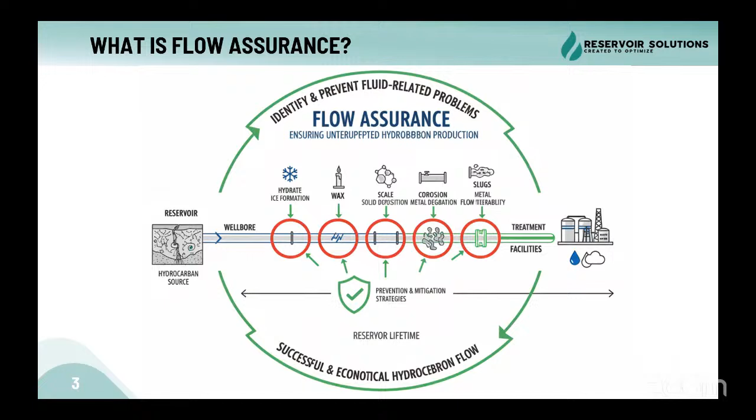So what are the challenges of flow assurance? The main risks of the multi-phase flow inside the reservoir itself, inside the well bore, inside the tubing, inside the flow line, are categorized into 4 categories: first, the abnormal pressure drop in the system; the tubing and pipeline plugging; the liquid handling troubles; and also the tubing and piping integrity.

We will dive deeper into each one of these, but let's first talk about the specific flow assurance challenges. The most specific or most popular flow assurance challenges are the tubing and pipe sizing... Let's continue.

The tubing and pipe sizing, liquid surge and slugging, of course the hydrate formation, the asphaltene, the wax, the scales and naphthenates, the sand formation, emulsion, erosion and corrosion, and the pressure surge. We will talk about each one of these in brief. But just to know, this is only an introductory lecture. We cannot dive deeper into the details of each one, but we will talk briefly about each one quickly.

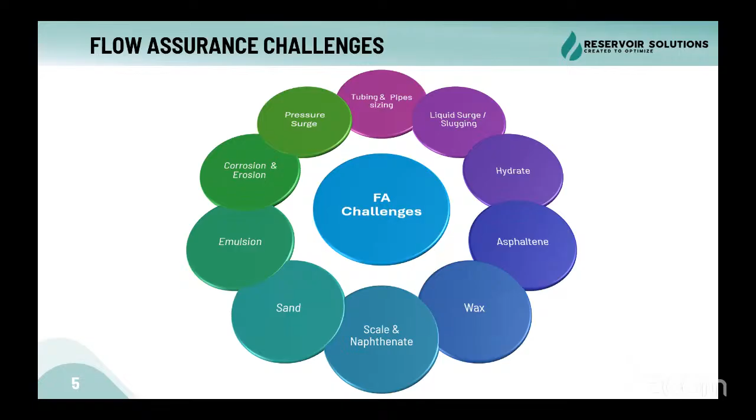So the first one is the tubing and pipeline sizing, which means the pressure drop. It depends on the following parameters: the pressure drop in the whole system at different reservoir lifetime, in order to take the maximum recovery of the reservoir. So the pressure drop matters because we need to take the maximum recovery of the reservoir.

Also, the fluid velocity - the pressure drop affects the velocity as it's high. If the velocity is very high, it may exceed the erosion velocity, and of course it will cause other problems such as erosion. Also, if the velocity is too low, this will allow for solid deposition, which is another flow assurance problem.

Also, the pressure affects the flow regime of the multi-phase flow, as it will be a concern in pressure drop and also in the liquid handling and the hold up of the line. So the sizing of the tubing and the pipelines matters because it will affect a lot of other flow assurance problems.

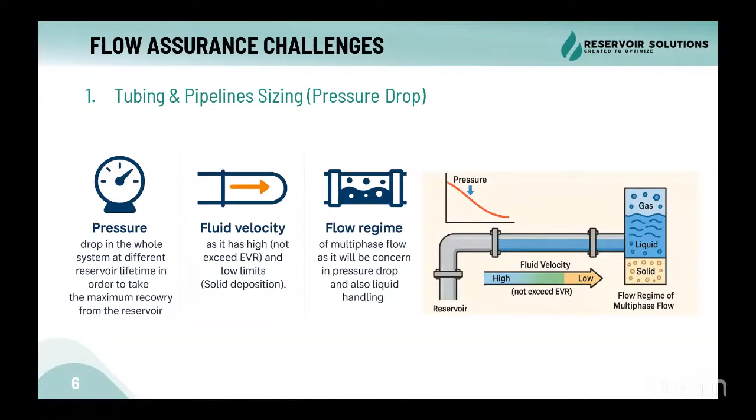The second flow assurance problem is liquid surge or slug flow, which is the most popular problem in multi-phase flow assurance systems. When gas, condensate, and water flow through the wellbore or pipeline, they undergo different flow regimes depending on gas velocity and liquid velocity.

Slug flow is one of the not preferred flow regimes in the pipeline, at which liquid slugs are received at the treatment facilities with limited time to handle, followed by gas phase only. So liquid surge for multi-phase flow is a critical challenge, especially during transient operation, causing a lot of problems to the pipeline.

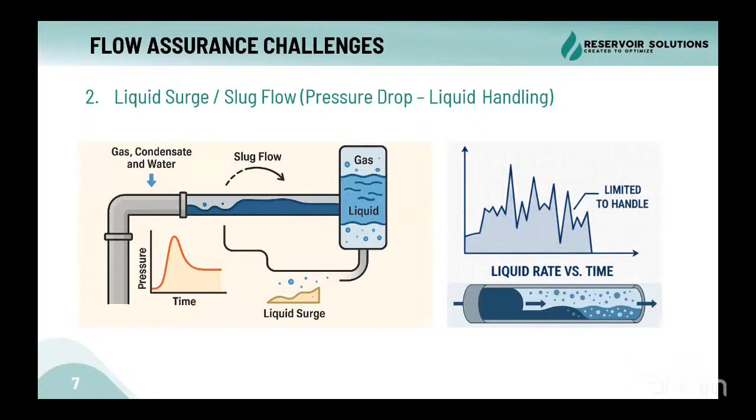It may damage downstream facilities because the surge volume and liquid slugs may exceed what the system is designed to handle. So it's very critical to mitigate the slugging problem in the design phase of the plant from the beginning. The third problem is the hydrate.

Hydrate is a solid ice-like compound of water, at which the water molecule hosts natural gas, methane, or CO2 molecules inside. This causes a lot of problems such as plugging of the pipeline.

This happens at the right combination of temperature and pressure, so there is a hydrate formation curve for the gas. At wellbore conditions of high pressure and high temperature, you are away from hydrate formation, and during flow through the flow line you may not even enter the hydrate formation zone.

But what if a problem happens in your downstream facilities and a shutdown occurs, and the fluid stays in the pipeline for a long time? Especially if the pipeline goes through a subsea system or seabed, the temperature will go down and enter the hydrate formation zone, and hydrate will begin to form.

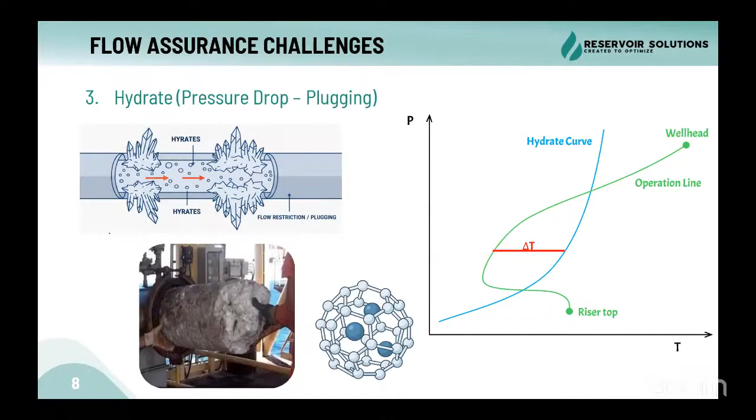Hydrate forms at the right combination of temperature and pressure, mainly high pressure and low temperature. This causes significant problems in the pipeline, potentially damaging it and causing plugging and production loss. This is the most critical flow assurance problem, especially in gas reservoirs.

The next flow assurance challenge is wax. Wax is a high molecular weight compound of oil, which has the potential to precipitate as a solid. As the temperature cools down, wax starts to precipitate and form a layer, as we can see here - this is the seabed and pipeline wall, and inside there is a wax deposit thickness.

The most significant problem of wax is that it reduces the throughput of the pipeline. Imagine you have a 26-inch pipeline, and forming a layer of wax on the inside wall will reduce the pipe diameter and also reduce the throughput of the line.

It will increase the pressure drop inside the line, create back pressure on your wells, and cause you to lose production. So if a build-up of solid waxy layer on the pipe walls is allowed to form, it will require periodical removal to avoid breakage and to increase the throughput of your pipeline.

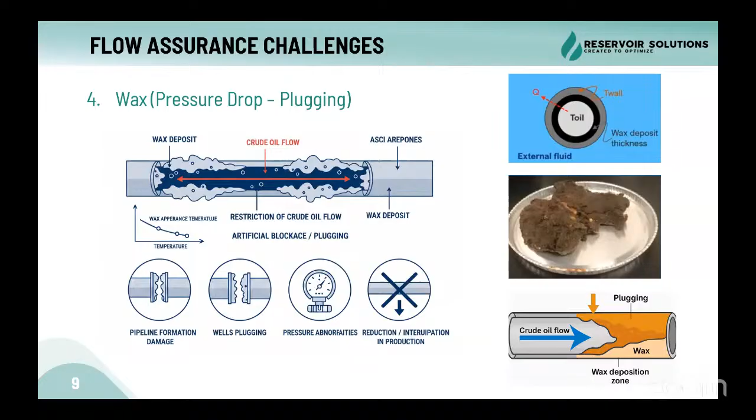The next flow assurance challenge is asphaltenes. Asphaltenes are heavy molecular substances found in crude oil, which precipitate out of the crude oil because of changes in process conditions. Asphaltenes can cause reservoir and formation damage, well plugging and pipeline plugging, and deposition on the surface of facilities. Unlike waxes, asphaltenes don't melt.

The wax can be melted by using heat or steam, increasing the heat of the pipeline to allow the wax layer to melt. But asphaltenes cannot melt like wax, so thermal methods such as insulation and hot oiling do not work to prevent or remediate asphaltenes deposition.

So the most important point for asphaltenes is the asphaltenes flocculation point, which is the pressure at which asphaltenes first begin to precipitate at a fixed temperature. Asphaltenes are related to pressure changes, or as mentioned, operation condition changes.

At this point, the asphaltenes are separated from the resins in the crude oil, as we can see here. After that, they can precipitate in the pipeline and cause plugging and well plugging, and also damage the formation of the reservoir itself.

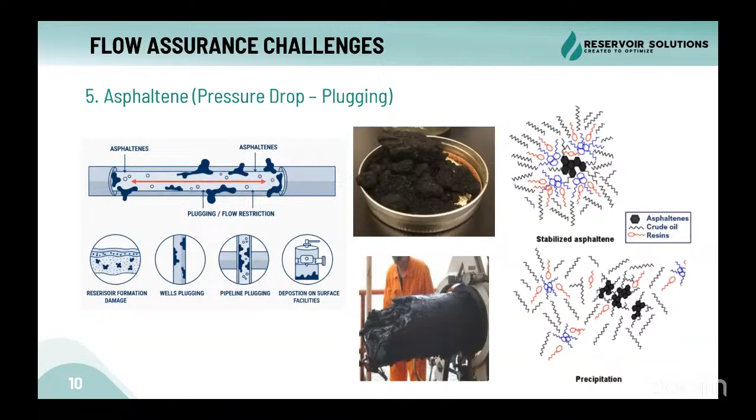The next flow assurance challenge is scaling. Scale means the precipitation and accumulation of insoluble crystals or salts from a mixture. Examples of oil scales are calcium carbonate, barium sulfate, iron sulfides, and strontium sulfates.

A lot of salts can precipitate and cause scale on the pipeline, which also allows plugging of the pipeline, reduces its throughput, increases the pressure drop, and creates back pressure on the wells, reducing production. This is a very significant, critical issue.

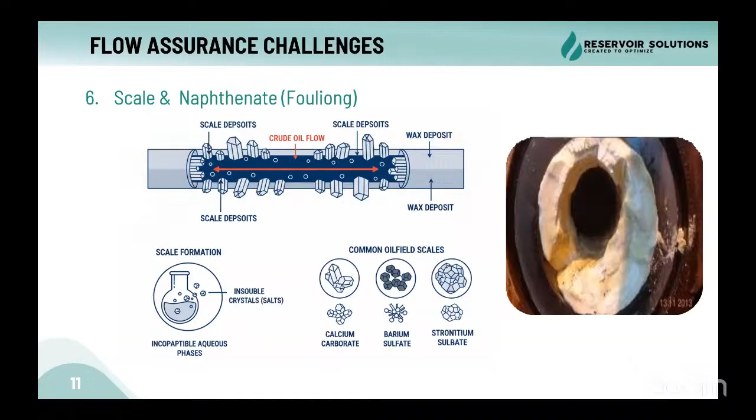The next problem is sand deposition. Sand produced from the reservoir is one of the challenges that affects system production, as it leads to plugging of the wells and pipelines, and it's also a main factor in the erosion process of the tubing and pipeline.

Sand can cause erosion to the tubing and pipelines because it moves with the liquid and gas at high velocity, causing erosion and damage to the pipeline and system integrity.

It can be controlled by installing a sand control system or sand control equipment inside the well, such as sand screens or gravel packing. Those are examples of sand control equipment used inside the well itself.

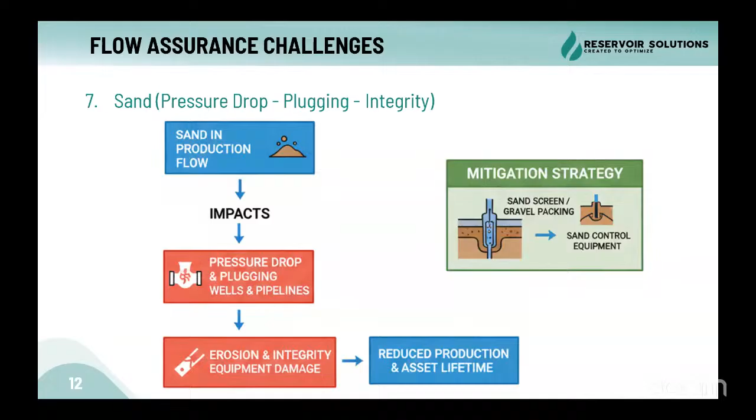The emulsion is the next flow assurance challenge. Emulsion is the immiscible mixture of oil and water. The major impact of emulsion is due to the formation of a stable emulsion, which increases fluid viscosity and can cause high pressure drop in the pipeline.

The pressure drop is one of the most significant problems that can happen in the pipeline, as it affects production, the throughput of the line, and the flow regime. So emulsion can increase the pressure drop inside the pipeline.

The emulsion can be mitigated through chemical injection, demulsifiers, and also by heating. Heating can be used to mitigate or get rid of emulsions, especially in downstream systems.

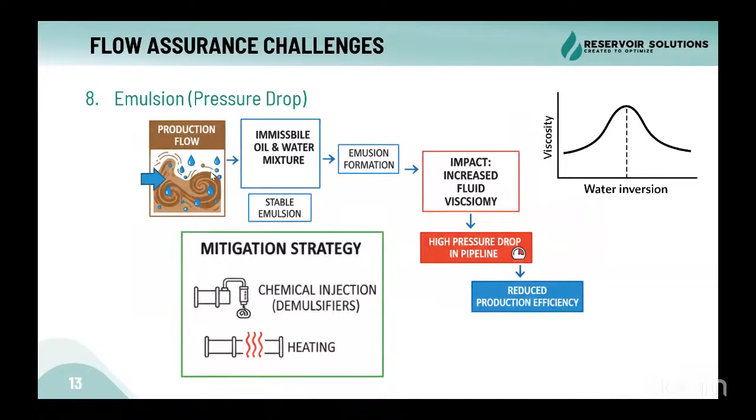The next flow assurance challenge is corrosion. Corrosion of the pipeline is the oxidation and electrochemical breakdown of the structure of the pipe. This happens through oxidation or electrochemical breakdown, and the pipeline corrosion can be either inside the pipeline or outside, external corrosion.

Inside the pipeline, it depends on the fluid properties and the fluid velocity. Imagine if we have H2S or CO2 inside the fluid from the reservoir, and we didn't use any corrosion inhibitor or mitigate the corrosion problem—of course it will allow the pipeline to oxidize and corrode, leading to leakages and structural failure inside the pipeline.

As mentioned, external corrosion is due to the soil, the water, and the outside environment of the pipeline.

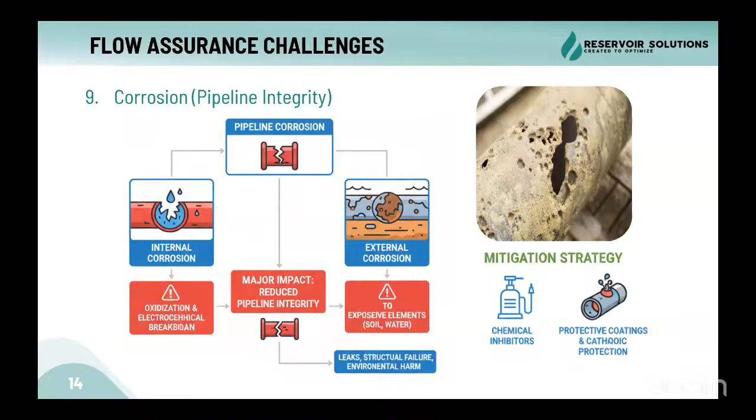The erosion we mentioned previously is related to the velocity inside the pipeline. So when the velocity increases for any reason, such as the gas, it will exceed the EVR, the erosion velocity ratio. When we reach this limit, we start to erode the pipeline from inside.

Can you hear me? Is the mic okay? Anyone? Yes. Do you have any questions? Are we going too fast, or is the pace okay for you?

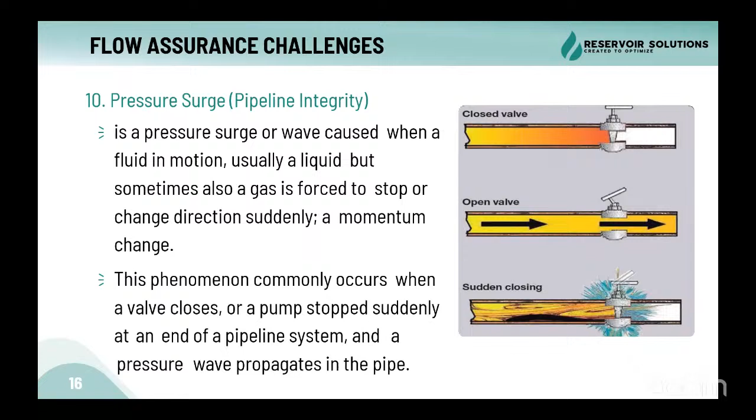This will, inshallah, be studied in detail in the next workshop, the 5-day workshop. We will take each flow assurance challenge in detail and talk about it, and we will also make a practical workshop using flow assurance softwares, inshallah, in the next workshop on October 15th.

So let's continue. What are the flow assurance analyses that a flow assurance engineer can do? Of course, the first analysis is steady state analysis. Steady state analysis just gives you a snapshot of your model, the pipeline, how the pressure will change, how the flow rate will change in the pipeline. You can just make a quick snapshot of your plant using the steady state analysis.

Of course, there's also the transient analysis or dynamic analysis, and it has a main role in the following development phases: such as design and engineering, the mapping of operation limits due to operation procedure changes, which we will talk about in a minute, and also safety analysis, which we will discuss later, inshallah.

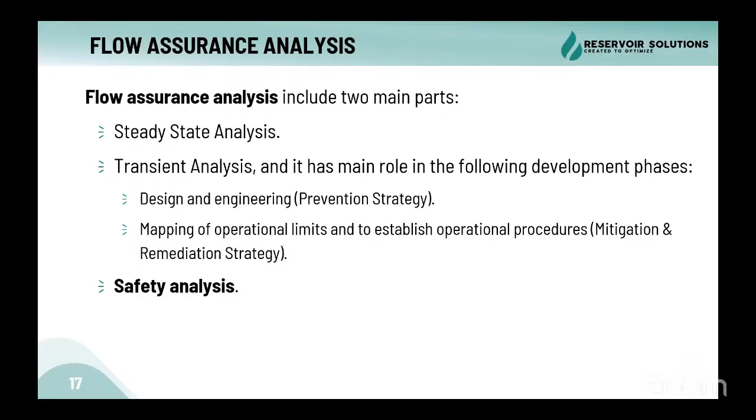In the design and engineering phase, we focus on maximizing the production window. So the sizing of the tubing and the pipeline, at which we select based on the pressure drop, the erosion velocity ratio, the liquid hold up, and temperature profile, should be selected during the design and engineering phase. At this phase, we have to make a transient or dynamic flow assurance study to select the proper sizing of the tubes and pipeline based on our flow characteristics and flow line design.

Also, the insulation and coverage - if the pipeline needs to be insulated due to hydrate formation, maybe due to temperature reduction, if the pipe is going through the seabed, and as we know the seabed temperature is very low, we have to check if it's possible to insulate, cover, or bury the pipeline under the seabed.

Or if we are talking onshore, under the sand, if it's required to be insulated or not. This will help the flow assurance engineer mitigate hydrate and wax formation through insulation and other solutions. Also, if it's required, external heating - if the temperature will drop significantly - we may require external heating or heat jacketing, steam jacketing, also to mitigate temperature-related flow assurance phenomena such as hydrate and wax formation.

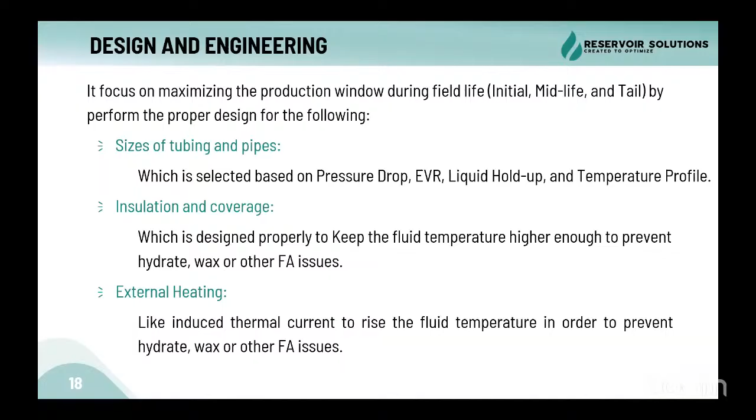Do we require inhibitors for hydrate, wax, or corrosion? This also has to be decided in the design and engineering phase: how we are going to inject them, what quantity is required, where to inject them, and what type of inhibitor is required.

Also, liquid inventory management is very important. As we mentioned, the slug or surge volume of the slugs is very significant to be calculated at the design phase, in order to size the separators and slug catcher to be able to handle the slug volume and the slugging in the pipeline.

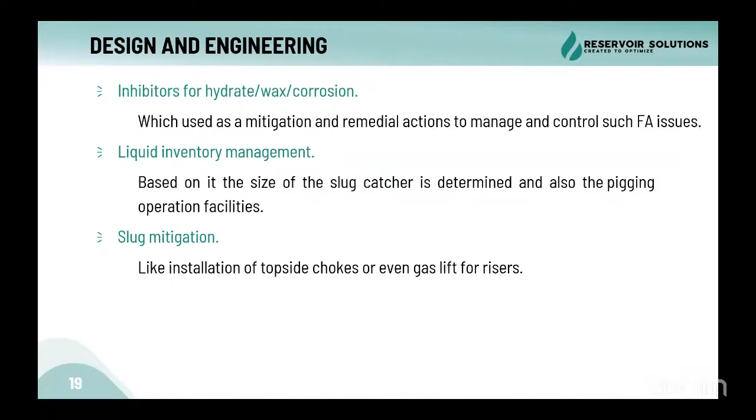Also, we have to design for any pipeline shutdown effect, the pressure, shutdown procedures, start-up procedures, ramp up. This also will affect the pressure surge, as we mentioned in the pipeline. So we have to check all of this phenomenon and run a dynamic analysis and transient analysis to predict if they are going to happen or not, based on our design of the system.

Also, if there is any pipeline blowdown, can the blowdown be handled through the system or not? Are the flow velocities going to exceed the erosion velocity or not? Is there any vibration that will happen during the blowdown? Any flow velocity going to exceed the sound velocity, for example?

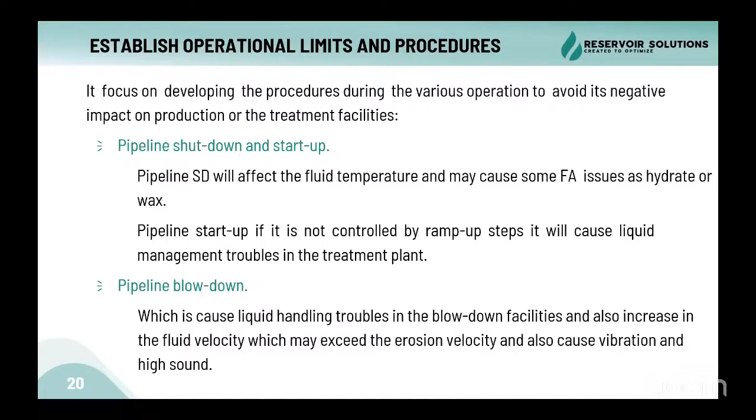So a lot of things can be discussed in the design phase of the plant based on the flow assurance modeling and transient modeling in the system. Also, as we mentioned, if we are going to ramp up or ramp down the wells, is there any effect on the liquid management? Is there any effect due to the turn down ratio of the pipeline being affected or not? Are we going to exceed the pipeline capacity?

Are we going to form hydrate? Are we going to form wax? Also, if there is any ability to do pipeline pigging, what will be the effect of the pigging on the pipeline? How much slugs are we going to receive by applying the pigging on the pipeline?

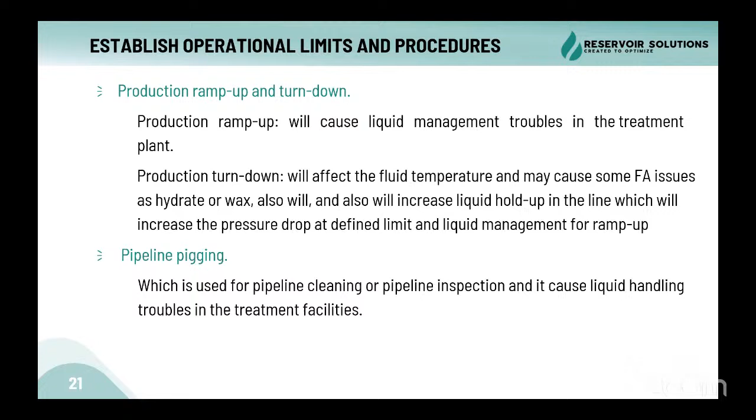And also, the pipeline pigging can be modeled in detail in the flow assurance softwares, and this will be one of our sessions held in the next workshop, inshallah. It will be step-by-step pigging modeling in the flow assurance software, inshallah.

As we mentioned, the slug management, the well shutdown, all of these are related to the operational flow assurance and the transient modeling in the flow assurance studies, which is done during either the operational phase or the design phase and start up of the system.

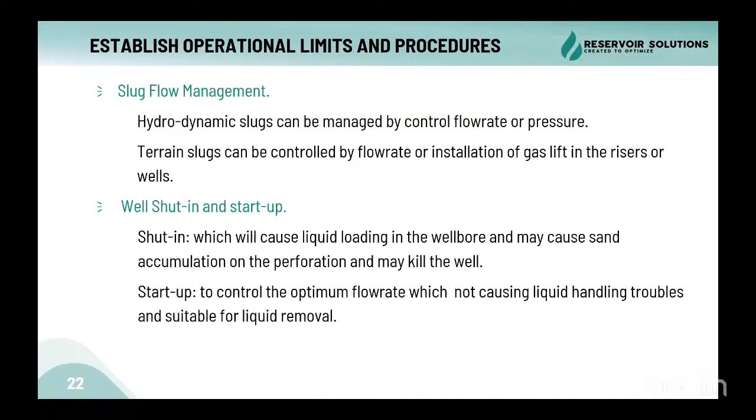Also, another type of analysis done through the flow assurance modeling softwares is the safety analysis. Safety analysis is related to the pressure surge. If there is any sudden closure of any valve, pump stoppage, or any water hammering, this can be predicted easily through the flow assurance softwares. If there is any pipeline leakage or rupture, what will happen to the pipeline? How to mitigate it? This must also be done for the safety and integrity of the plant.

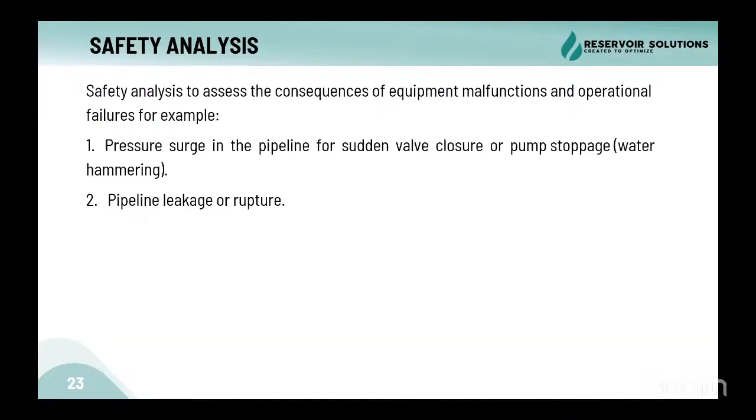So, what is the multi-phase flow? The multi-phase flow is two or more immiscible phases flowing together, such as gas, oil, water, solids, or a combination of them. This is multi-phase flow.

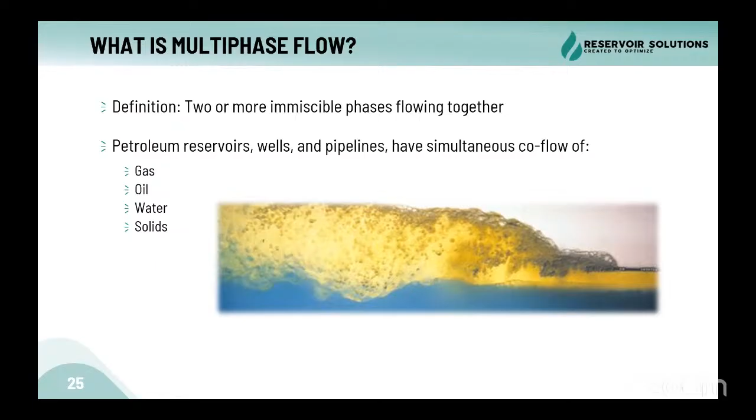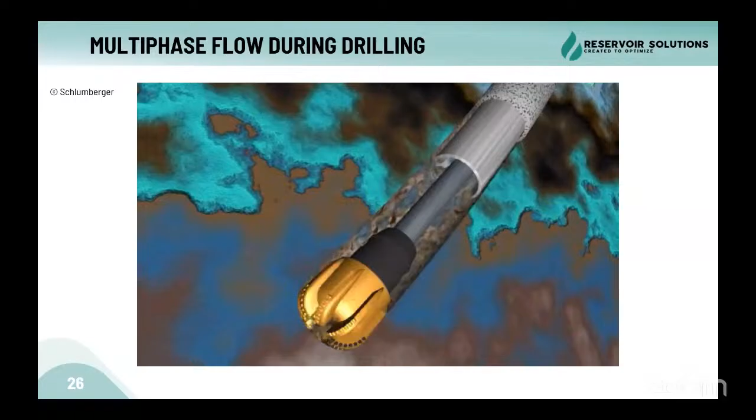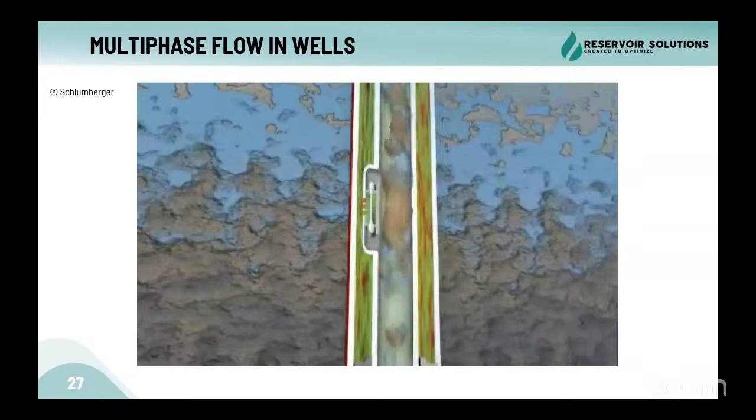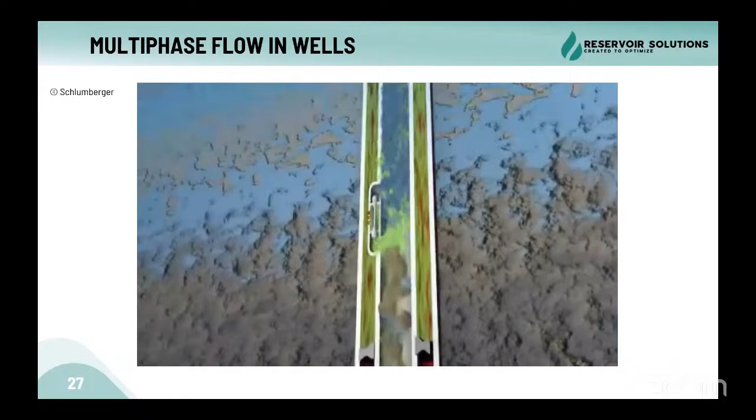Multi-phase flow starts from the drilling, as we can see. Through the drilling, there will be a lot of fluids moving up through the tube, such as the mud, the rocks, even the fluid from the reservoir. And also inside the well itself and the well piping and tubing, there will be multi-phase flow: oil, water, and gas, maybe also solids. So the multi-phase flow is present in all the systems or in all the phases of the plant, starting from the reservoir to the flow line and the onshore plant.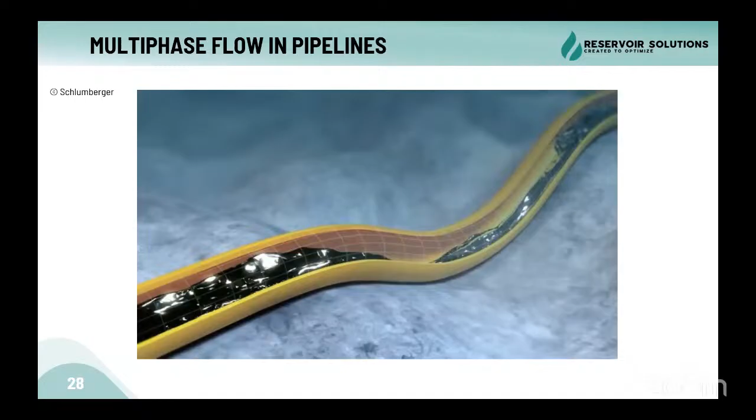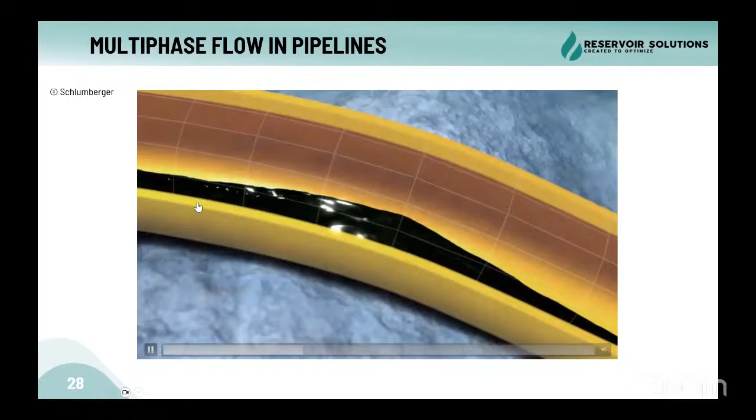And also multi-phase flow can happen during operation due to such operations as pigging, slugging, or liquid surge.

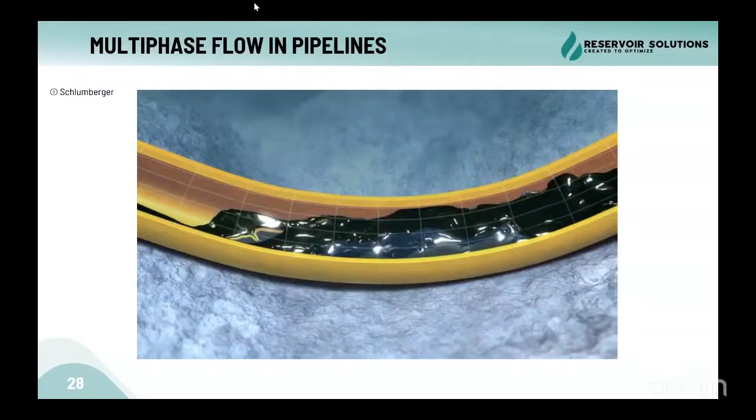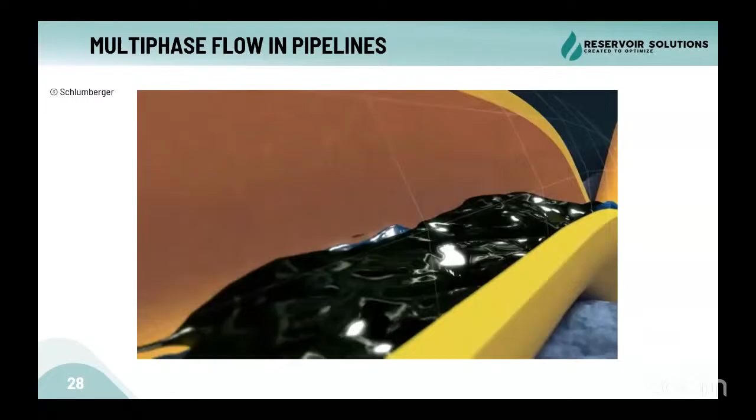Is my voice clear? Do you hear me? Yes, sir, it is clear. Yes, sir, we can. Do you have any question, any comment, anything? I feel like I'm talking to myself. Everything is okay? Yes, sir. Yes, sir. Keep going, it's a helpful workshop. Okay.

So the challenges of the multi-phase flow, there are a lot of challenges, especially for the flow calculation. For single phase flow, the calculations are very easy. You can calculate the gas velocity, pressure drop, everything can be calculated very easily for single phase flow. But for multi-phase flow, the calculations are very complicated.

Most oil and gas flow assurance engineers use a lot of experiments and correlations to predict the multi-phase flow and its properties. Also, due to instability and how to control the multi-phase flow due to changes in velocity, pressure drop, liquid slugging, and the deposition of solids, there is a complex set of flow assurance problems that could happen with multi-phase flow. Also in the separation of the multi-phase flow: water treatment, metering, pumping.

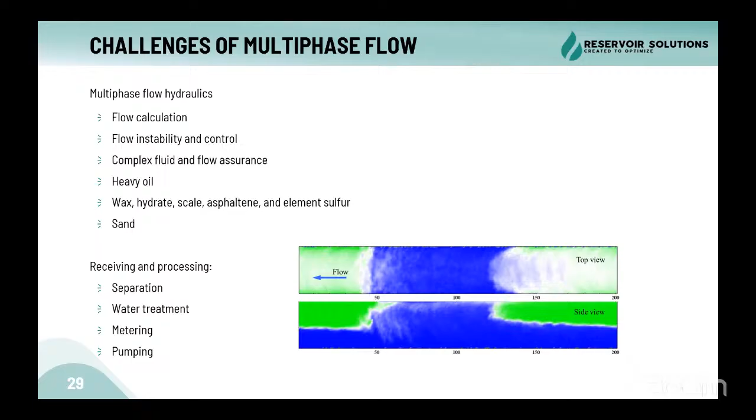So after the fluid flows from the reservoir and through the tubing, it needs to be lifted to the surface. If the reservoir bottom hole pressure is high enough to move the fluid to the surface, it will be a naturally flowing well. When the reservoir pressure is not sufficient to move the fluid from the bottom to the surface of the well, artificial lift systems must be used.

After the fluid arrives at the top, it's usually directed to the downstream facilities, and it may be transported as a multi-phase flow - liquid, gas, water, maybe condensate - and it may also have some sand.

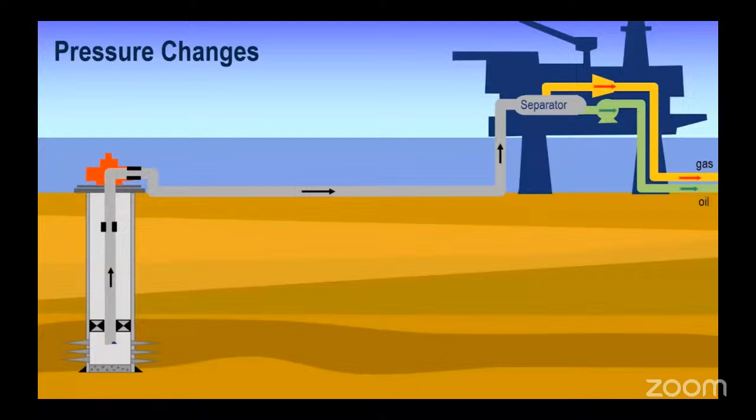The driving force that moves the fluid from the reservoir along the production system is the energy available in the form of compressed fluid in the reservoir. As the fluid moves along the system components, we have pressure drops - the pressure drops continuously in the direction of flow. The reservoir pressure is the moving force, the delta P.

If the reservoir pressure relative to the downstream facilities is enough, the fluid will move to the facilities by natural forces. Okay, are you following up?

So the drawdown of the fluid is a pressure drop between the reservoir and the wellbore pressure. And as we move up through the tubing, there is a pressure drop inside the tubing due to the gravitational force. Also, each element in the system has its own pressure drop.

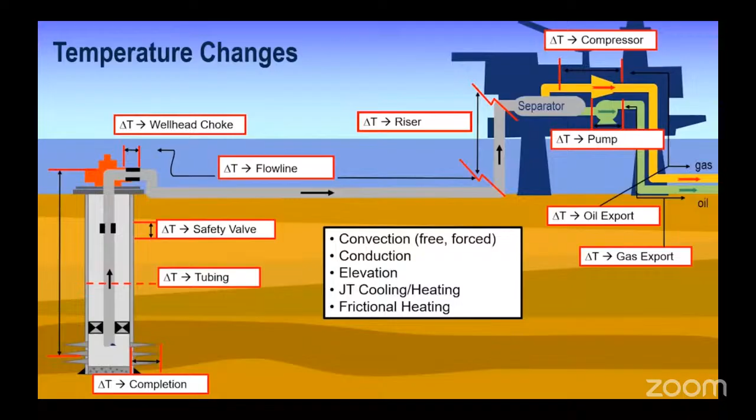Temperature in the system changes as the pressure changes, and we need to take care of the temperature and pressure changes. So we have to make analysis of the systems, such as using the nodal analysis. I believe all of you know about the nodal analysis method, which is used by production engineers - I believe all of you studied it in university. So this enables the production engineer to analyze and optimize the production systems.

We first select a node that represents the inlet, and a node that represents the outlet. Here, the reservoir is the inlet, and the separator is the outlet. And we must specify a fixed pressure at the boundary conditions for the reservoir and the separator.

The inflow is the flow from the reservoir up to the nodal point. So we need to describe the flow inside the reservoir from the reservoir pressure till the bottom hole pressure in the inflow curve, shown here in red color, which represents the pressure loss inside the reservoir. The pressure at flow rate of 0 is the average reservoir pressure, which is what we should expect when the well is in shut-in condition.

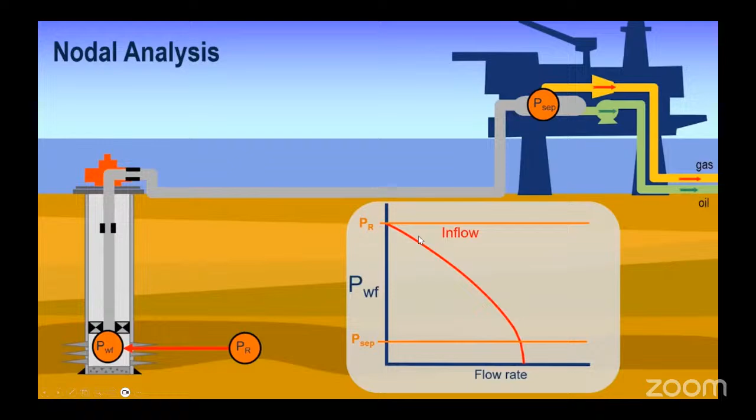As the flow rate increases, the pressure loss increases in the system.

The outflow curve represents the pressure losses in the well and the surface facilities. As flow rate increases, we need higher bottom hole flowing pressure to lift the fluid up to the separator. The intersection between these two curves shows the operating point at which the system is theoretically capable of producing.

We can use this as a basis to examine ways to increase production. For example, if we did hydraulic fracturing, the fracture affects the IPR of the well and reduces the well skin factor, shifting the inflow curve to the right, which increases the productivity of the well.

Likewise, if we install an ESP pump, it shifts the outflow curve, and this has a similar effect of increasing the flow rate of the well.

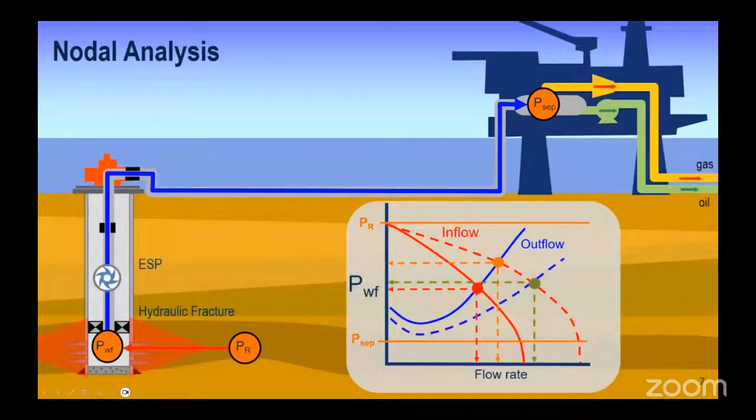So why is multi-phase flow preferred? There are a lot of problems that can be caused by multi-phase flow. So why are we going to use it instead of separating the fluids subsea? Why don't we install a subsea separator to separate the gas from the water, making the flow through the pipeline single phase, and get rid of all these flow assurance problems?

The main reason is economical. We install different subsea systems in different locations, and if the reservoir has different drilling locations, we would have to install subsea separation in each location. This would be very costly, and the capital cost would be very high.

Now flow assurance software has made our life easy. We can make a flow assurance model and keep it running during the lifetime of the plant, which significantly reduces the capital cost of using the subsea system.

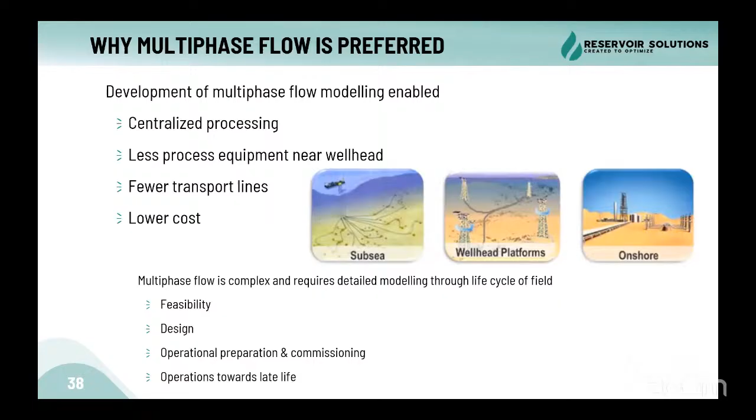As we mentioned, multi-phase flow can be very challenging because it can have gas and water droplets, gas and condensate, and solids just like hydrates, wax, and asphaltenes. So multi-phase flow is very challenging.

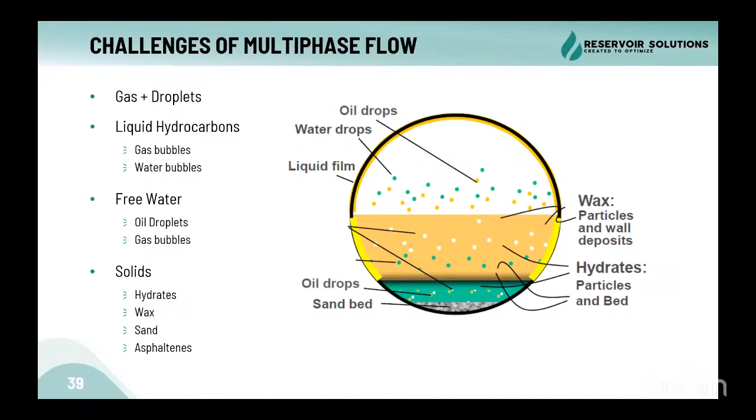Let's check the next experiment. This experiment was made on the Schlumberger Cambridge flow loop. This is a 6-inch pipe with 1,500 barrels of oil per day and 1,500 barrels of water per day, with a viscosity of the oil of about 1.5, more or less like water.

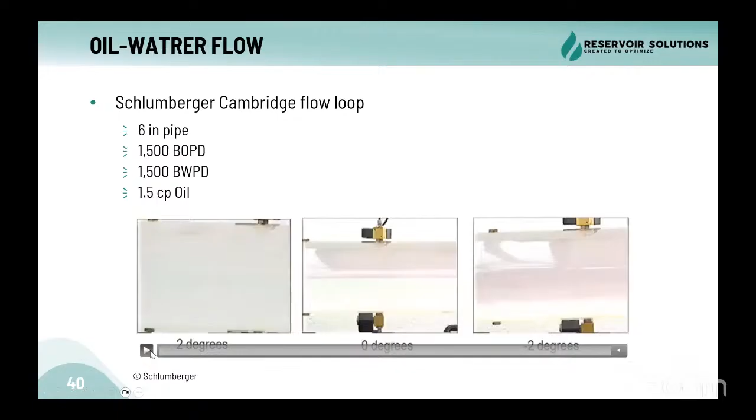First of all, we used a perfectly horizontal pipeline to demonstrate. We made the oil red and the water blue. Let's check what happened during the experiment. In the perfectly horizontal pipeline, you can see the phases are moving at the same velocity, with a very small velocity difference at the interface.

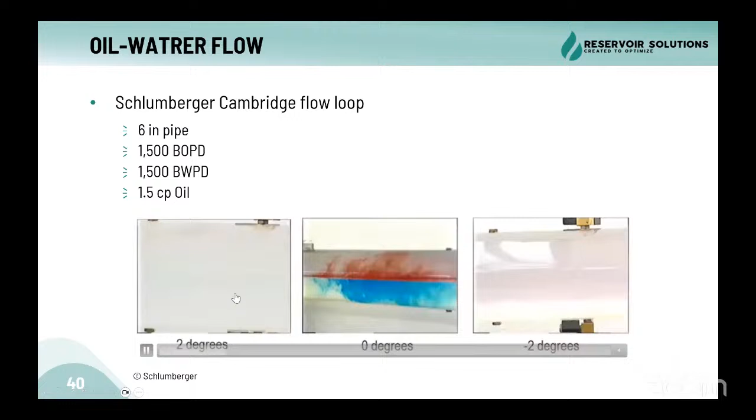However, if we increase the pipe inclination by 2 degrees, it might be noticeable. Let's check what happens for the multi-phase flow with just oil and water. You can see here the oil is moving so fast, and the water is accumulating at the bottom of the pipeline.

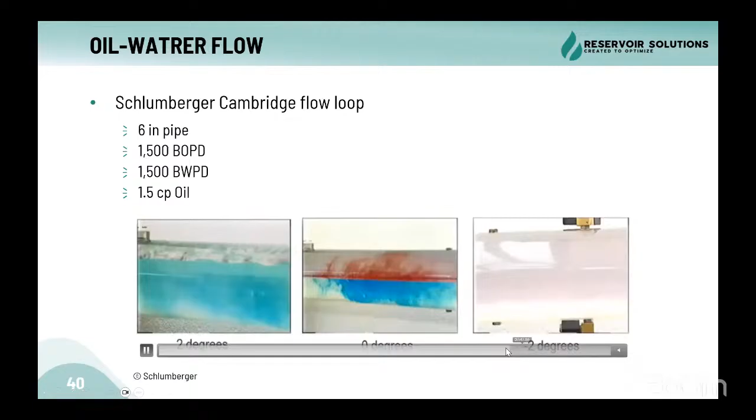So what if we made the inclination 2 degrees downward on the other side? Let's check. Remember, the oil is in red and water in blue. You can see the water is moving very fast. This is just 2 degrees of inclination, which cannot be noticed by the human eye.

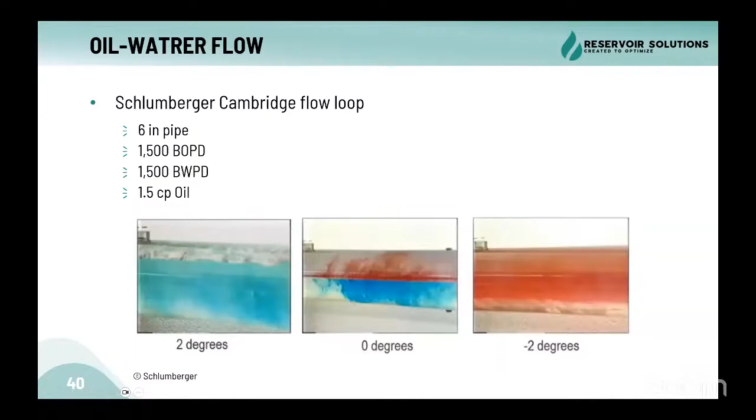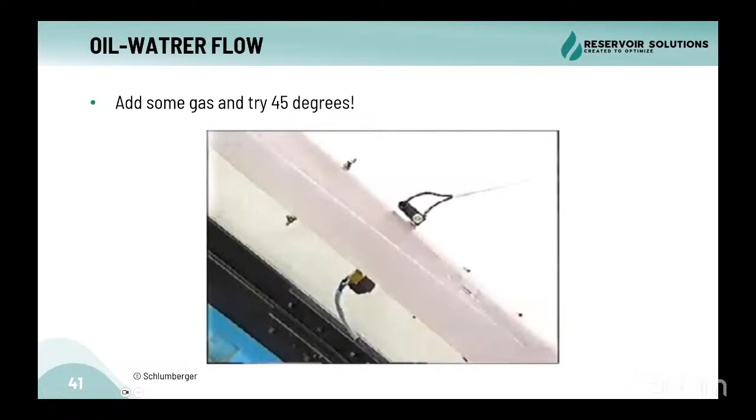So what about if we increased the inclination by 45 degrees and added some gas to the pipeline? Let's see what will happen. Of course, we will have a mess like this. It's very complicated, which is why we need simulation to describe multi-phase flow inside the system.

We cannot just use Excel sheets. We can use correlations to represent the challenges in multi-phase flow, but it must be supported by experiments, correlations, and software to describe it properly. Imagine what will happen along a very long pipeline in a subsea system with different inclinations, angles, flow rates, pressures, and temperatures. There are a lot of challenges that cannot be easily predicted by correlations or by just steady state simulation.

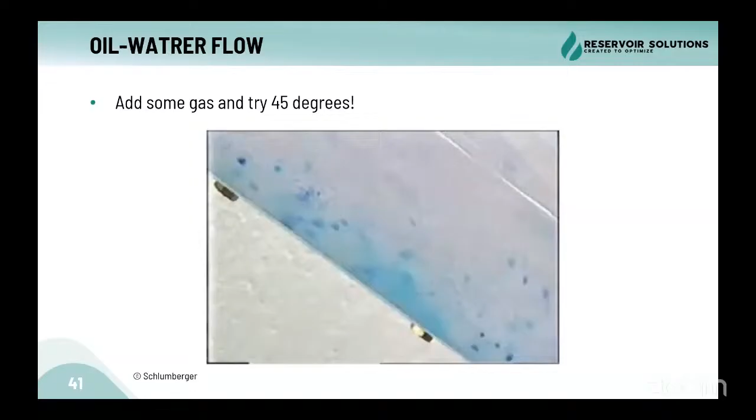When we have gas and liquid in the pipeline, and when the liquid completely fills a pipeline, at times alternated by when the liquid only partially fills the pipeline, we might have a slug. We will talk about slugging later in details in the workshop. But the flow will be complex, and the flow regimes will not be easily predicted.

So the phase envelope can start with single phase flow. At some points we can start to have multi-phase flow. There is also the liquid hold up in the pipeline. Generally, the gas will travel faster than the liquid, as the gas is lighter and less viscous, so the liquid is held up compared to the gas. I will show you some videos.

Finally, there is a pressure and temperature change in the system, which will affect this kind of multi-phase flow problems, and it's significantly more complicated than single phase flow problems. As we can see, there's hydrates, scale, asphaltenes, wax, and we also have to accurately predict the analysis or the composition of the flow to get the right results from the simulation.

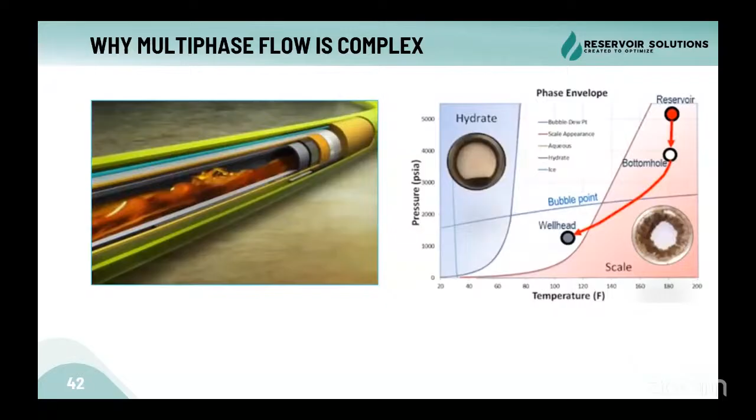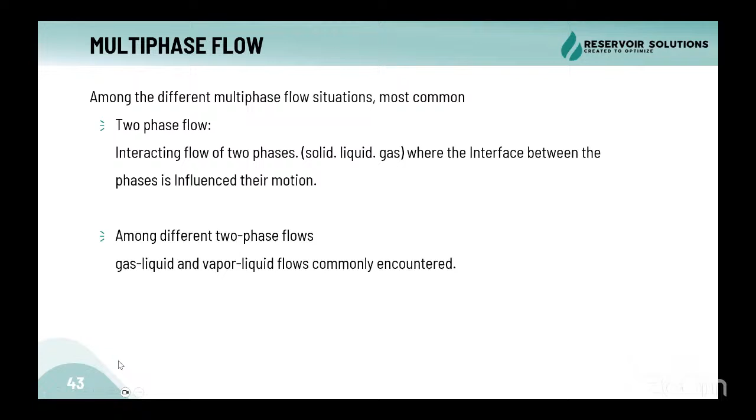Among the different multi-phase flows, the most common is the two-phase flow. Two-phase flow is liquid and gas, or solid and gas. Among the different two-phase flows, gas and liquid are the most commonly encountered. This takes us to the flow patterns or flow regimes.

In flow assurance, flow regimes refer to the characteristic pattern or distribution of phases, such as the liquid and the gas, within the multi-phase system. The regime is directly determined by factors such as the phase fraction - how much liquid, how much gas, how much solids - the flow rates of each one, the physical properties like density, viscosity, surface tension, and most significantly, the pipe geometry.

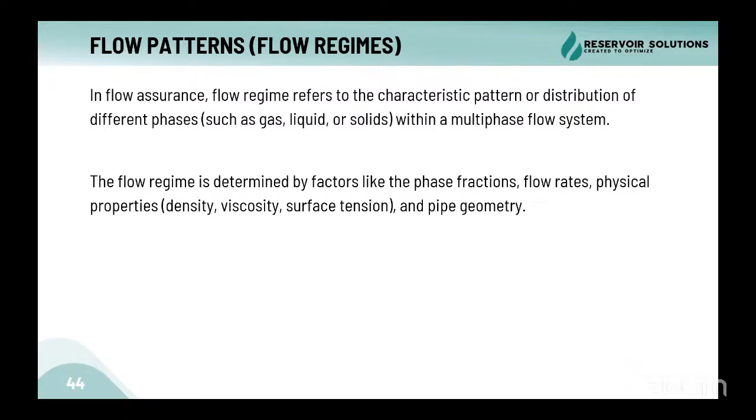As also when the gas is very quickly passing along the pipeline, it can form the plug or slug flow. At higher gas flow rates, the gas can travel quickly through the middle, and it can be annular flow.

And at very high liquid rates, this can cause slugging and slug flow, and maybe also plug flow. At a very low liquid flow rate, it will be annular flow. Okay, this is for horizontal pipelines.

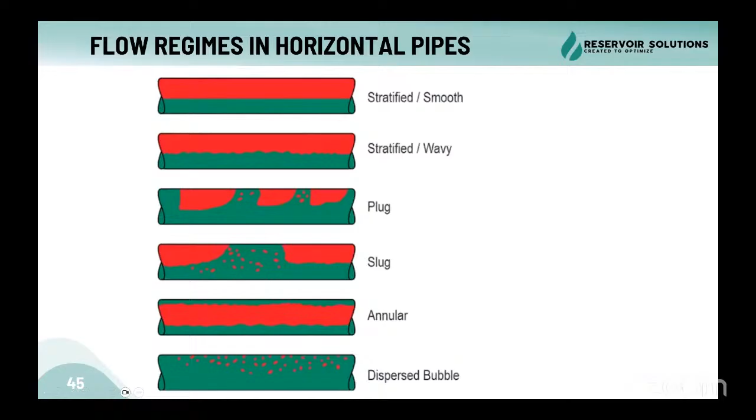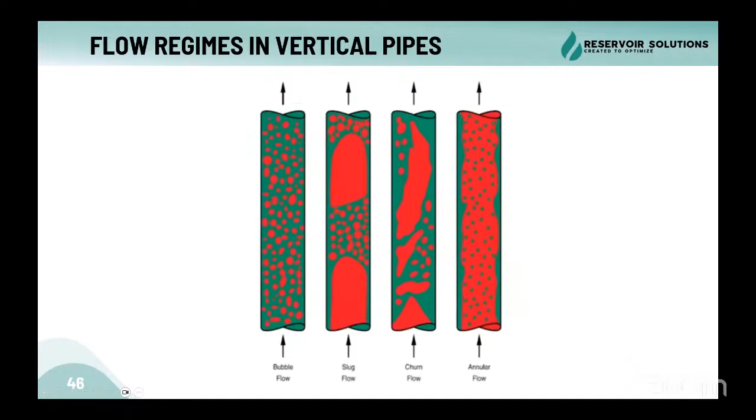Also, when the flow rate of the gas is reduced, the slug flow will be the dominant flow. Determining the liquid hold up in the pipeline is very critical because, as we mentioned, it can cause a pressure surge and can cause slugging in the pipeline, and also can cause significant problems in the downstream system, such as the separators and the slug catchers, as we mentioned before.

So the hold up depends on the velocities of the gas and the liquid, and also depends on how much volume fraction of the liquid is inside the pipeline. We will talk about it in much more detail, inshallah, in the workshop.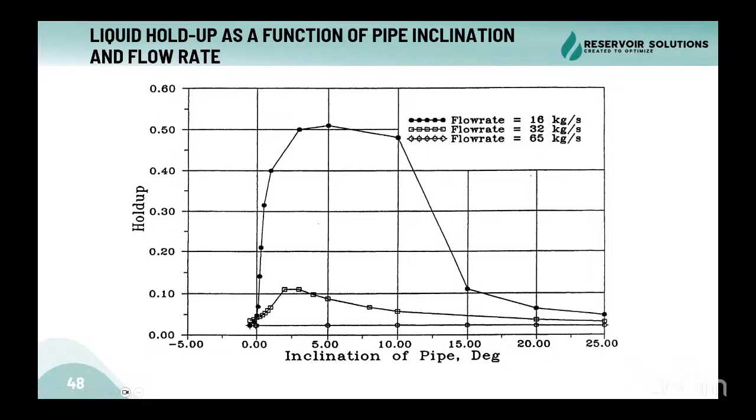So what are the hazards of unstable production due to multi-phase flow? As we mentioned, there will be a lot of damage inside the facilities due to surge volumes and surge pressure, and also there is instability in the production.

There is increase in the corrosion rate. Imagine you are having downstream facilities with compressors and a lot of equipment, and you receive a sudden slug of water or liquid. This will cause a lot of problems to your downstream system and affect it significantly, and you may lose a lot of production in the system.

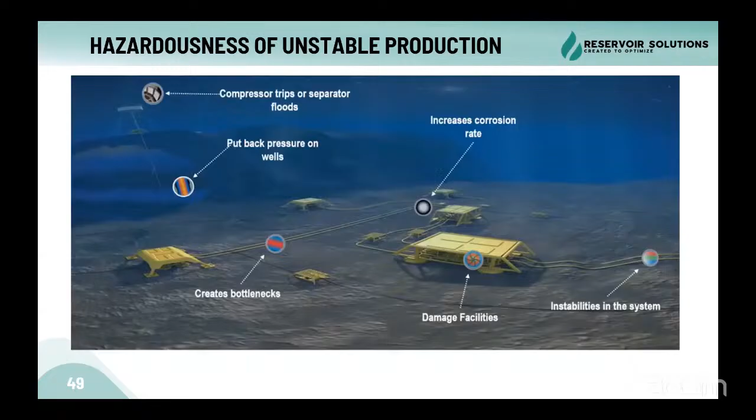So what are the types of slugging? We have three types: hydrodynamic slugging, terrain slugging, and operational slugging. Hydrodynamic slugging is related to the flow regime, the flow rates, and the velocity.

Terrain slugging is related to the geometry of the pipeline. So if there is a riser, the flow regime will change, and slugging may occur due to liquid accumulation. Also, operation-induced slugging is created by the system, maybe during the ramp-up of the wells, pigging, or any operational issue related slugs.

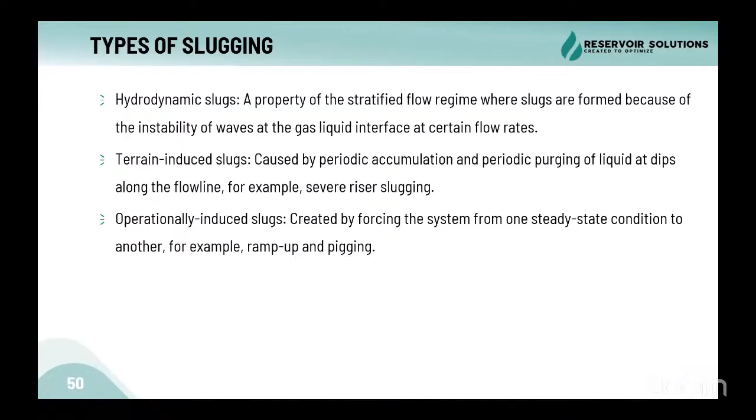As mentioned, terrain slugging is related to the geometry of the pipeline. So if you have a riser, liquid will start to accumulate until the pressure of the gas is able to push the liquid, and this will cause a slug. In this case, it's called terrain slugging.

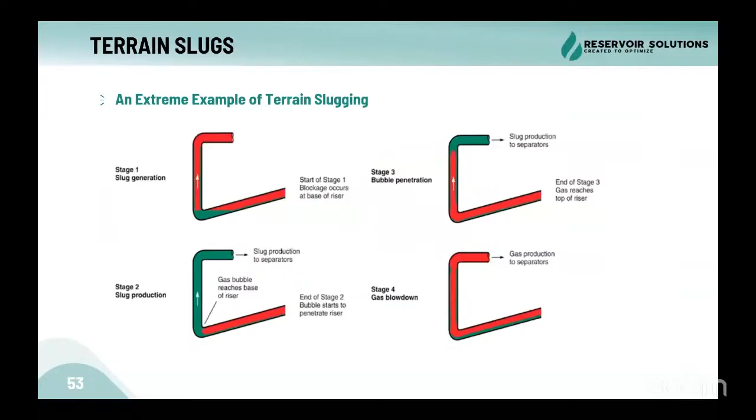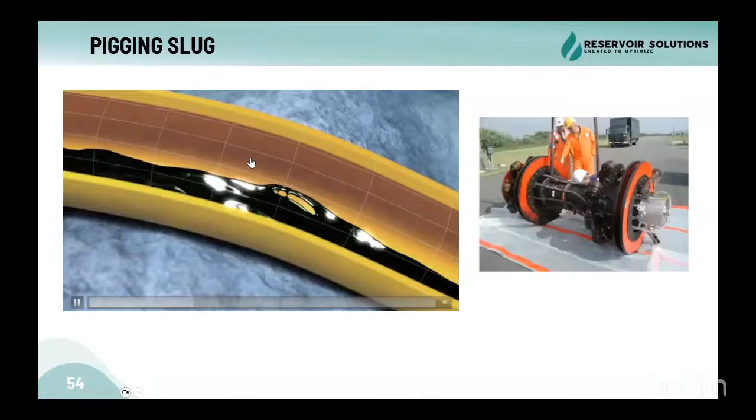Operational slugging, as mentioned, is due to ramp up, pigging, or operational procedures in the plant. So imagine you have a pig inside the pipeline. It will remove all the liquid from the pipeline down to the downstream facilities, and of course it will create a significant liquid slug in the pipeline.

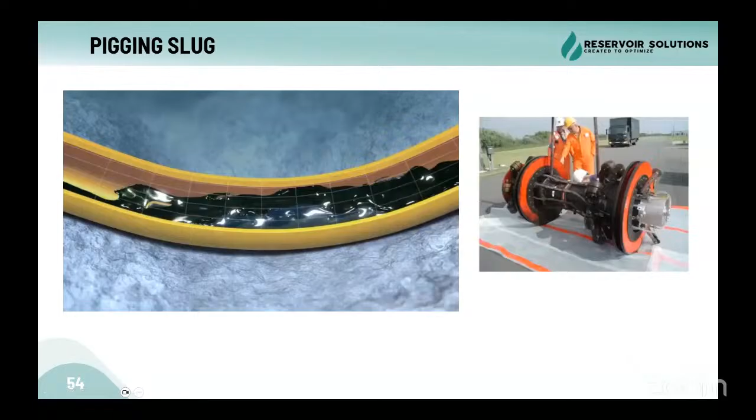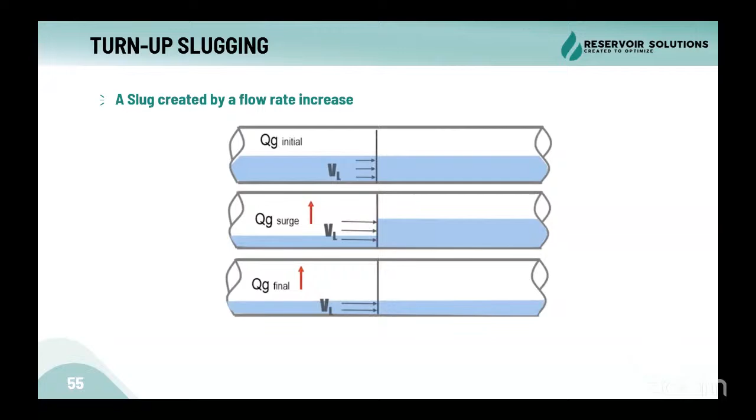Also, there is a turn-up slugging when you increase the flow rate or ramp up production from the wells. This will increase the gas volume inside the pipeline, and also remove some liquid from the bottom of the pipeline, and this will also cause a significant slug in the pipeline.

Lastly, what is liquid surge? Liquid surge is the powerful movement of a given quantity of liquid, which comes in suddenly through increasing liquid rate suddenly, as mentioned, through operation or pigging or something. And the surge volume is the difference in volume or the slug volume which we can receive entering the slug catcher in the downstream facilities.

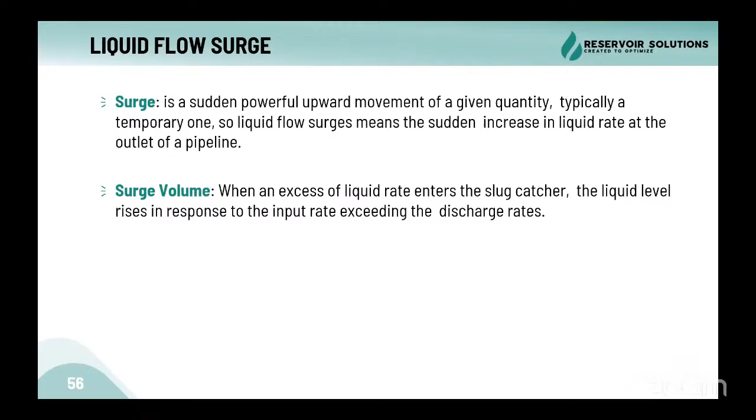This takes us to the most important topic in flow assurance, which is the fundamentals of petroleum chemistry. Of course, if you are going to make a model or simulation, you have to respect your plant and the characteristics of your flow. If you enter wrong properties or wrong characteristics of your flow, you are not going to have good results, and you are not going to detect the problems in the right manner.

So understanding the fundamentals of chemistry of petroleum and gas is very important. That's why we are going to have a dedicated workshop related to the PVT system. We will also use some software to generate the PVT files and use them to make the flow assurance models, which will be indicated in detail in the workshop, inshallah.

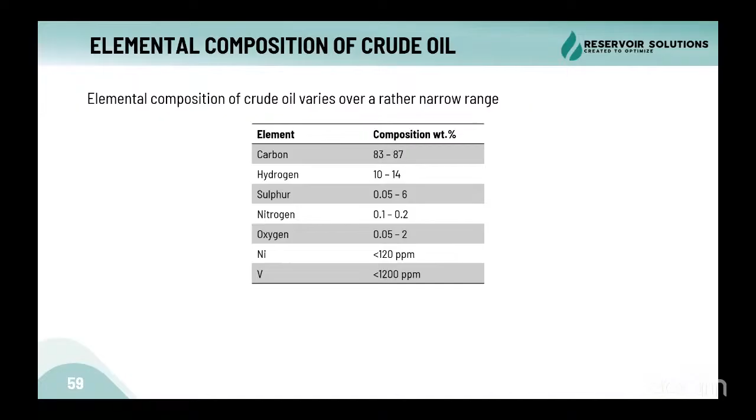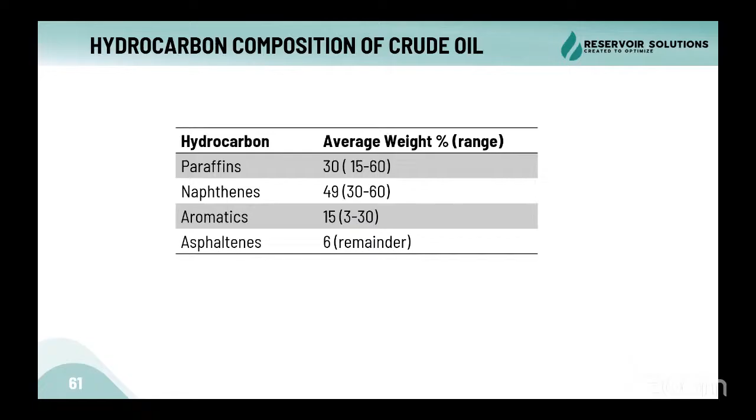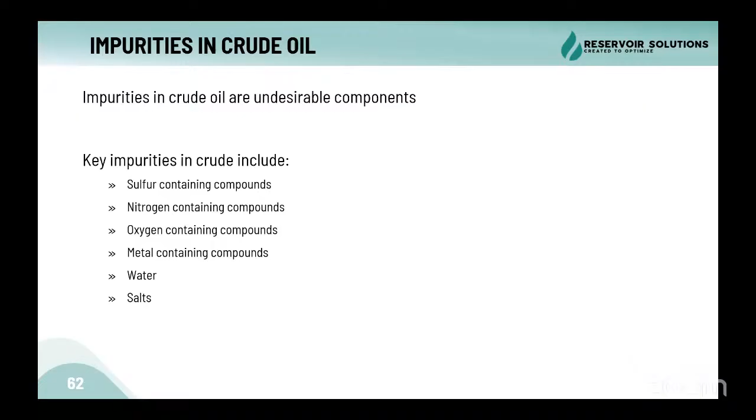It's very important to understand the composition of the crude oil in terms of elements and compounds: the paraffins, the naphthenes, the aromatics, the asphaltenes. Also it's important to know what impurities are in the crude oil and what significant problems they can cause to the systems and downstream facilities.

So the most important characteristic is the phase behavior of the system. We will learn how to generate the PVT file and the phase diagram for each separate location. You can generate your own phase envelope and predict the different characteristics of the fluid, gas, oil, or condensate. How to generate the PVT file based on reservoir conditions, wellhead conditions, and separator conditions, how to make it perfectly right for your simulation, and how to know if it's the right PVT file or composition. This will be covered in detail in the workshop, inshallah.

Excuse me for going very quickly through this presentation. The webinar is only 1 hour, so I cannot go in very deep details for each specific element. That's why I believe I couldn't deliver the most important sides or specifics about the flow assurance studies and modeling.

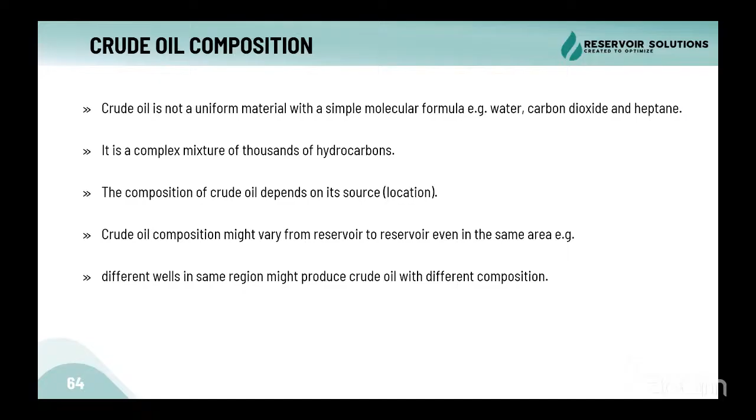Inshallah, I will be with you in the workshop, and I hope I can answer all of your questions, and we will be hand by hand doing the workshops using the softwares. I will make sure that you understand each and every specific detail about the flow assurance challenges and flow assurance modeling, starting from the steady state simulation to the dynamic simulation or transient simulation, and also the safety analysis.

So that's it for me. That's wrapping up our presentation. Let's check if you have any questions in the comments. I will try to answer your questions quickly. So let's stop sharing my screen, and then I will read the comments and try to answer your questions, inshallah. Thank you.

Mazid Ibrahim is asking, how does asphaltene precipitation differ from wax deposition and how is it managed? As I mentioned in the beginning of the presentation, each specific challenge in the flow assurance can have multiple PhD studies in it.